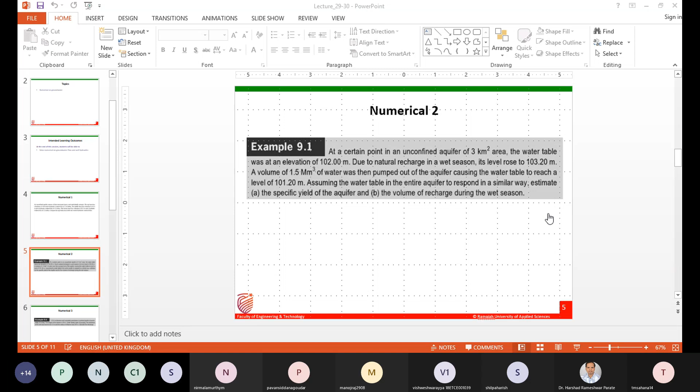Sir, your voice is not audible, sir. Sir, not able to hear you, sir. Yes, sir. Sir, we are able to see the screen and not able to hear you, sir. Yes, sir. Okay. Am I audible now? Yes, sir. Great.

Okay. Have you noted down this numerical which I shared earlier? If you have not noted it, note down this numerical. You are going to solve it now. You can note this numerical afterwards. So what is given in this numerical? At a certain point in an unconfined aquifer of 3 square kilometer area. So the area of the unconfined aquifer is given as 3 square kilometer.

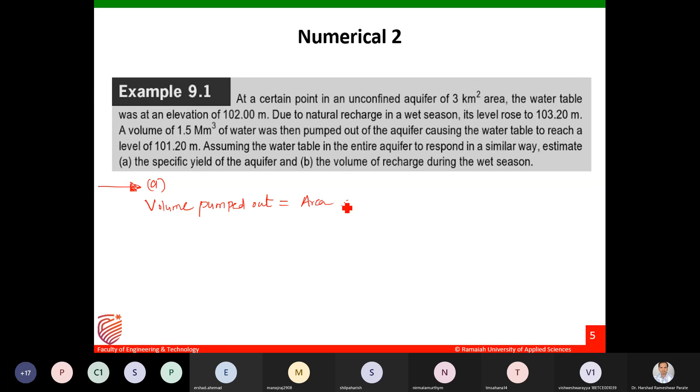volume pumped out is nothing but the area of aquifer into drop in water level into specific yield. So this specific yield is basically the difference between the behavior of water above the ground level and below the ground level. Below the ground level, this specific yield plays the role.

Now we know the volume that is pumped out. It is given here as 1.5 million meter cube. So I will write 1.5 into 10 to the power 6; million means 10 to the power 6, in meter cube. So this is equal to, what is the area? Area is given as 3 square kilometer. So I'll convert into meter square. So 3 into 10 to the power 6 is the area.

How much is the drop in the water level? It is 103.2. This is after recharge, then only the pumping started. That's what's mentioned in the problem. So 103.2, and it fell down to 101.2, into specific yield; we have to calculate Sy. Solve and tell me what specific yield value you are getting.

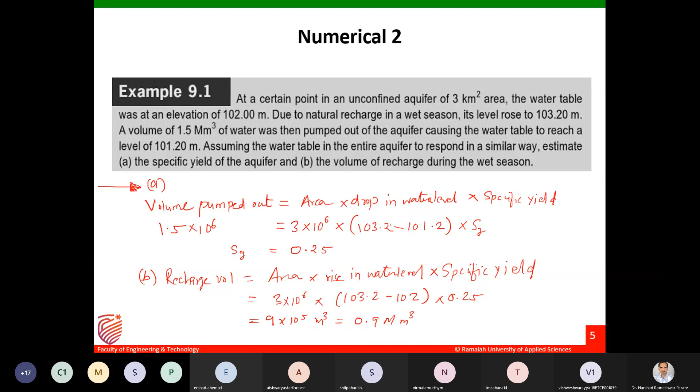Okay. Shall I move to the next? 102, not 101.2, sir. Okay. We have to see, no? Initially it was 102. After that recharge takes place. Then it rose to 103.2. So rise due to the recharge will be 103.2 minus initial level, that is 102. Okay. Now shall I go to the next one? Yes, sir.

So next one. It's for the confined aquifer and it's a well hydraulics problem. A 30 centimeter diameter well completely penetrates a confined aquifer of permeability 45 meter per day. The length of strainer is 20 meter. That basically indicates the thickness of your confined aquifer. Strainer is nothing but perforated casings we put for the aquifer region, saturated region. So the B value, the thickness of your aquifer, is 20 meters.

Under the steady state of pumping, the drawdown at the well was found to be 3 meter and the radius of influence was 300 meter. Calculate the discharge. So how do we solve? First we'll note down the data given. Diameter of my well is 0.3, so the radius of my well becomes 15 centimeters, 0.15 meter.

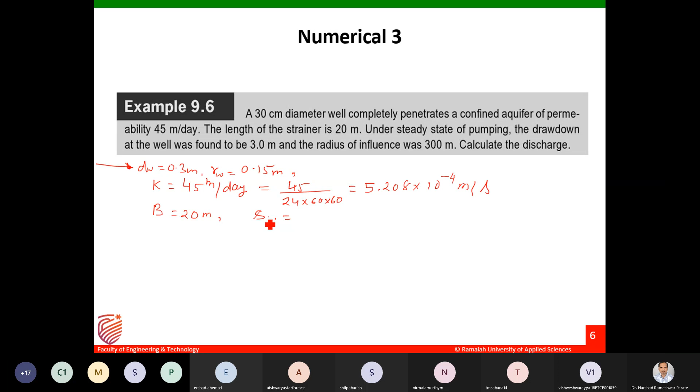Other data given: B is given as 20 meter. SW, small s, the drawdown at the pumping well, is 3 meter. And the radius of influence, capital R, is given here as 300.

Sir, your voice is breaking, sir. Okay, is it clear now? Still breaking? It's clear, sir.

Okay, so this is the data given. Radius of the pumping well, 0.15 meter. Permeability K, 45 meter per day, comes to 5.208 into 10 to the power minus 4 meter per second. B, the thickness of the aquifer, 20 meters. Drawdown at the pumping well 3 meter, and R, the radius of influence, 300 meter. What equation should we use? Told you in the previous class.

Q equal to pi K (h2 square minus h1 square) by ln of r2 by r1. Sir, that is unconfined aquifer; this is confined aquifer. When the square term comes, that is for unconfined aquifer. For confined aquifer, what is the equation? T equal to KB equal to Q by 2 pi (H2 minus H1) ln of R2 by R1. And when radius of influence is given, that equation will reduce to, in a second I'll open. Just hold on.

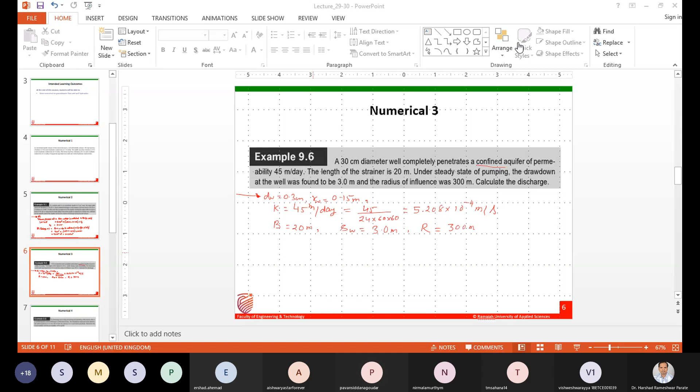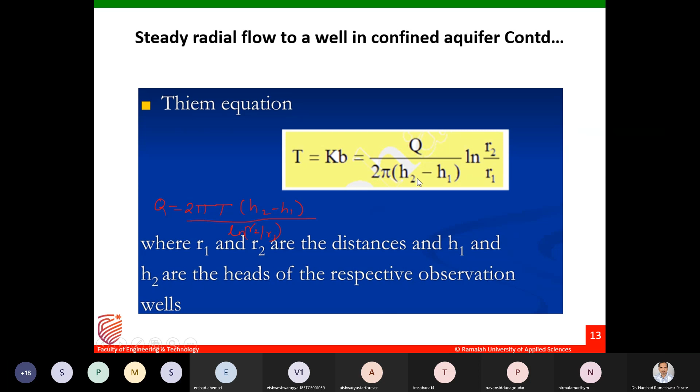So for steady flow in a confined aquifer, this is our basic equation: T equal to KB equal to Q divided by 2 pi (H2 minus H1) ln R2 by R1. In terms of drawdown, Q is 2 pi T (S1 minus S2) divided by ln of R2 by R1. We use this when we know the water levels of two adjacent wells. If we know the radius of influence and the drawdown at the pumping well, it reduces to Q equal to 2 pi T SW divided by ln of R by RW.

So in this one, what happens? At the radius of influence, your drop in the water level is 0. So S2 becomes 0, S1 will be SW, R2 becomes capital R, and R1 becomes RW.

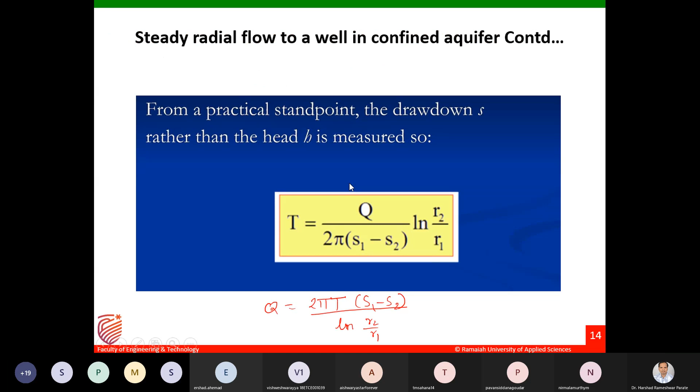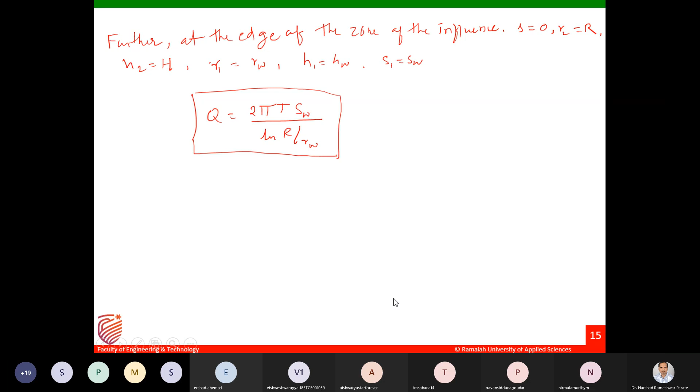So when the radius of influence is given, we should use this formula: Q is equal to 2 pi T SW ln of R by RW. It's a simplified way of this one when the radius of influence is given. Okay, so we are going to use this formula. Q is equal to 2 pi T SW over ln of R by RW. Correct?

Am I audible? Yes. Okay. Yes, sir. Sometimes you guys become so silent, I wonder whether I am audible or not.

So here all the data we know, only we have to calculate the T. So what is the T? T is equal to K into B. T is transmissibility, that is equal to permeability into the thickness of the aquifer. Permeability is 5.208 10 to the power minus 4 multiplied by the B value, that is 20 meters, the length of the strainer, equal to the thickness of your aquifer. What's the value?

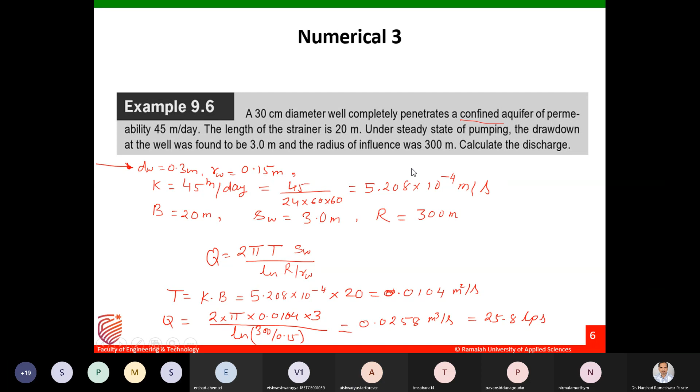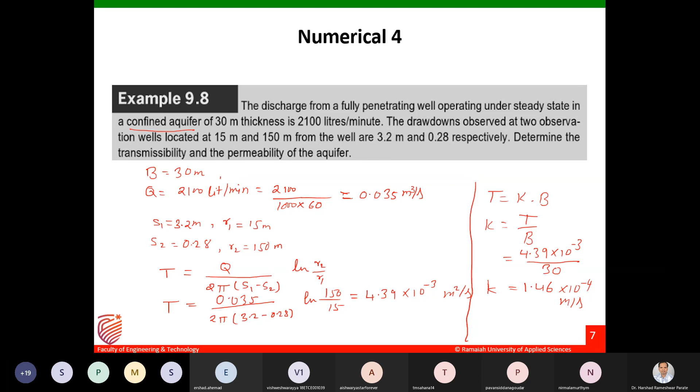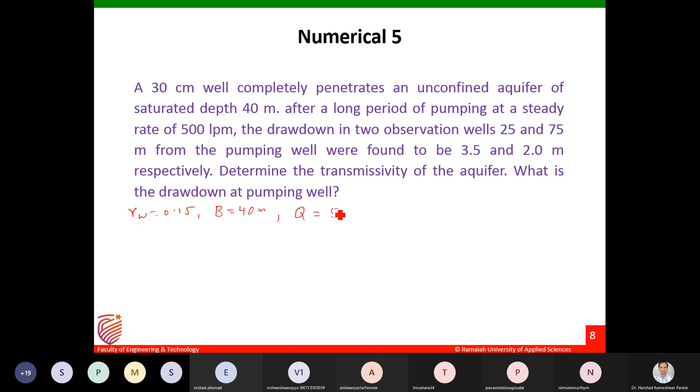After a long period of pumping, steady state rate of 500 liter per minute. So my Q value is 500 liter per minute. I'll convert it into meter cube per second. So 500 divided by 1000 into 60. How much? 8.3 into 10 power minus 3 meter cube per second.

Now, what is given? The drawdown in the two observation wells, 25 and 75 meter from the pumping well, were found to be 3.5 and 2 meter respectively. So S1 is equal to 3.5. Remember, this aquifer is unconfined. So for unconfined, we should have the values in the form of piezometric head, that is H value. So if you want to calculate your H1, H1 is equal to your saturated thickness minus S1. So this is equal to 40 minus 3.5.

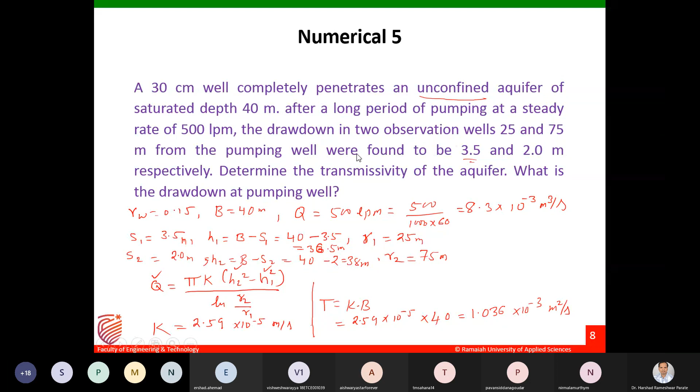So now, if you are not able to get it, then I'll explain it in the next class. I'll be taking the 12:55 class today, so there we will complete this numerical. Okay. Till here it is fine, no? So just try to attempt. If you're not able to solve it, we'll solve it in the 12:55 class. I think I'm eating into your break time. So I'll stop here and then we'll complete it at 12:55.